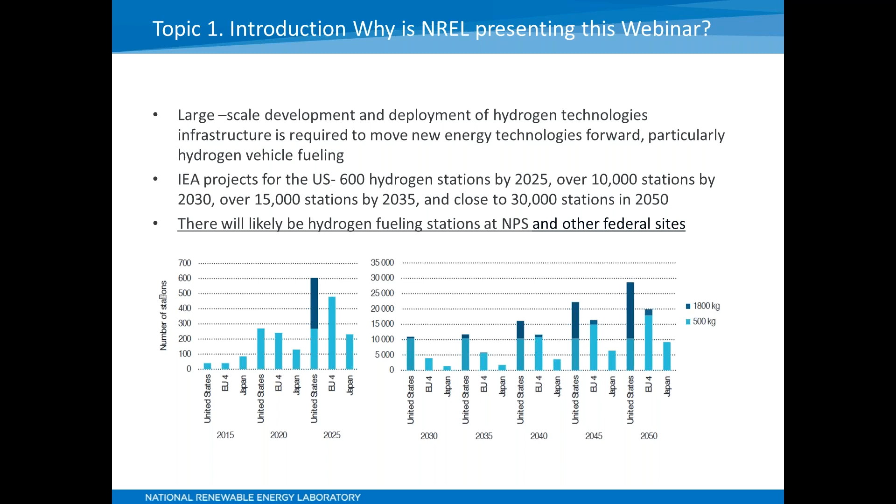So these projects, although there aren't that many of them, are in some ways prototypes, and they are starting to happen. Given that the deployment of hydrogen looks like it's moving forward, specifically the deployment of hydrogen fuel cell vehicles, it's likely that you'll see some kind of project at your site. So the purpose of this webinar is to give you an orientation, so that if that happens, you have an idea of what this technology is about, and how it's regulated, how the codes and standards apply to these fueling stations.

So a little background on hydrogen. Why is there this interest in hydrogen? It may seem a little bit unusual because right now there is not a retail infrastructure for distributing hydrogen, and there is not the kind of hydrogen production that will be needed for widespread deployment. So there will be a lot of infrastructure that is needed. So why is there this push to do this?

There are several reasons. One is hydrogen is an excellent fuel for fuel cells, and fuel cells produce almost no hydrocarbon emissions. So it's a zero emissions technology, zero carbon emissions technology.

Another really critical point is that hydrogen can be produced from a variety of renewable energy sources, such as wind power, solar, and biomass, and some of these technologies are very well developed and fairly mature. So what you can do to address this gap in hydrogen production is use some of these renewable technologies, such as wind and solar, to produce large amounts of hydrogen.

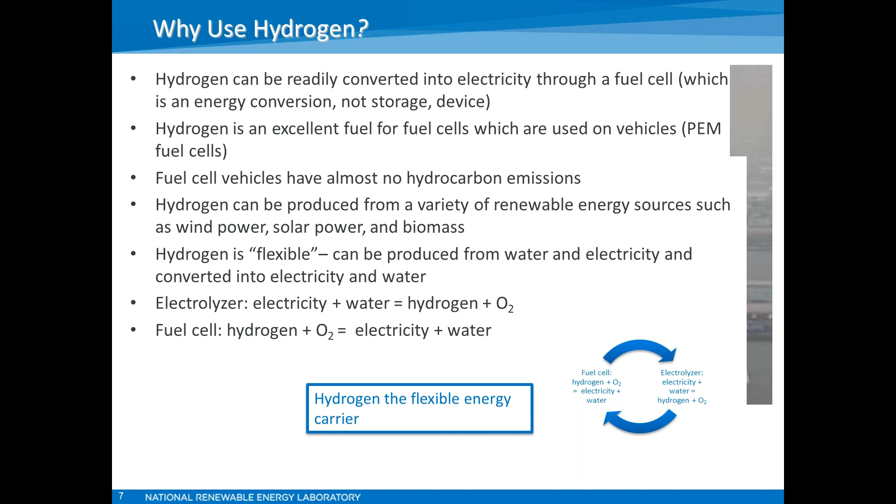A little bit about air pollution and how important it is, even though it maybe doesn't rise to the top of the list as far as topics in the news. In 2002, there were 6,500 premature deaths from air pollution in California. To put that in perspective, there were 3,500 fire deaths nationally. So in the whole United States, there are far fewer fire deaths than there were deaths from air pollution in one state, California. And the United States, even in areas with major vehicle density, still has relatively clean air.

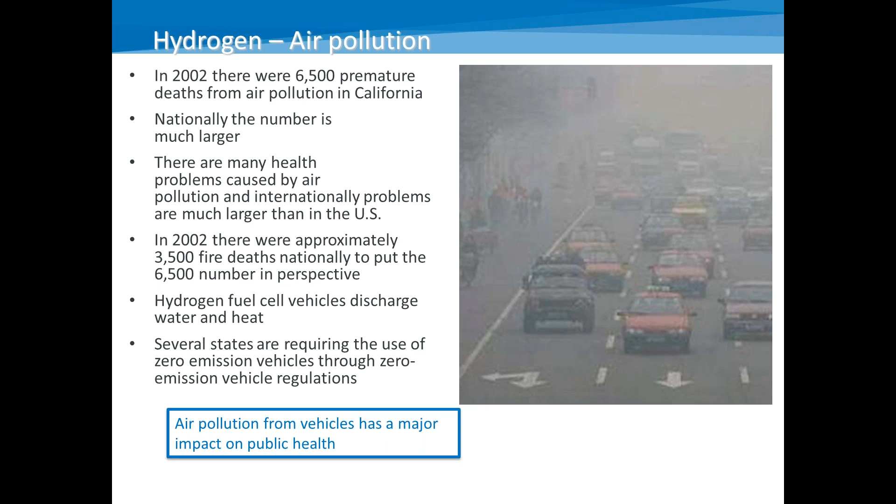This air pollution problem causing premature death is much worse in other locations. Probably many of you have seen pictures of Beijing and have a sense of what the air quality is there. So to address this problem in the United States, there are actually regulations that have been put in place.

As a result of these regulations, the deployment of hydrogen fuel cell vehicles happened in California initially, but it's also underway in this northeast corridor. There are stations being built in Massachusetts, Connecticut, New York, and I believe Rhode Island, to create a network of stations on the East Coast so that vehicles can transit the coast and still have fuel available.

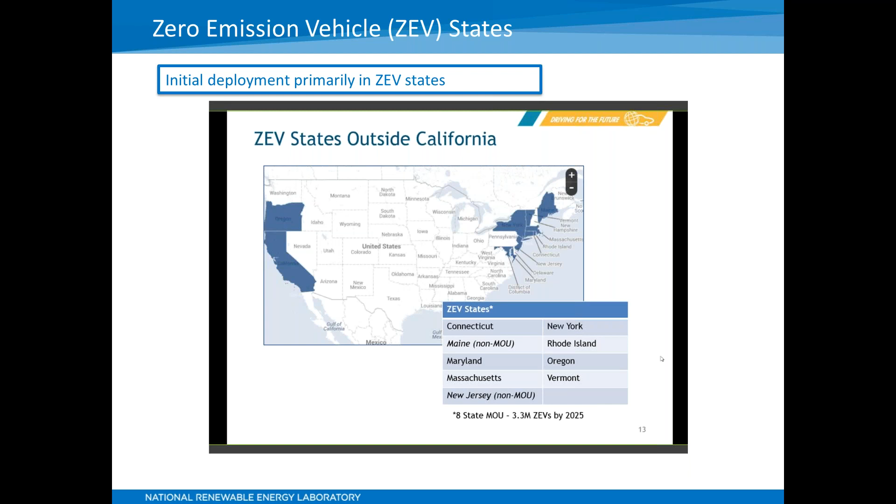In California, there's a network of stations. I believe there's 30 retail stations open now that allow you to use a hydrogen vehicle throughout the state of California.

So a little bit about the properties of hydrogen. Just to make it clear, hydrogen is not new as far as its being used with hydrogen fuel cell vehicles. It's been around quite some time.

As a commercial commodity, there was a process developed in 1913 by the German chemist Fritz Haber to make ammonia from hydrogen, and this had a huge global impact because it allowed for the mass production of fertilizers required to feed people, resulting in literally millions of people getting food who wouldn't have without this fertilizer to expand crop growth.

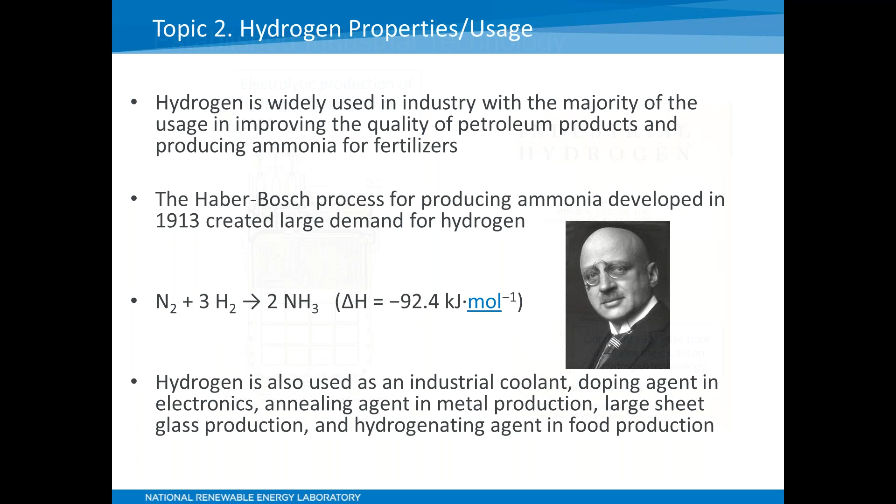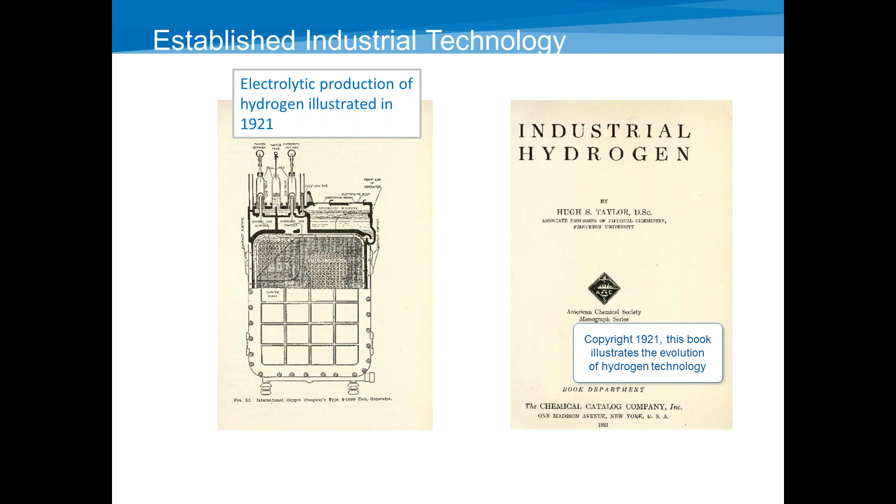I think we skipped a slide here. Just want to mention this is an example of the historical use of hydrogen. This is a handbook on industrial hydrogen that was published almost 100 years ago, and actually a lot of the information there is perfectly valid today.

Now I want to get into a little bit of the physical properties of hydrogen, because hydrogen really has some unique characteristics. It's important if you're dealing with a hydrogen project, particularly if you've got safety responsibility, to understand some things about hydrogen that make it different from other materials and other gases you might have to regulate.

First of all, hydrogen is the lightest element. What you see in that second column is that it has a specific gravity of 0.07 — that's the density relative to air. So what that means is that if you release hydrogen into the air, it goes upwards, and it goes upwards very quickly. Hydrogen, unlike some other gases and fuels, can't be odorized.

As a result, sensors are required to detect hydrogen releases at locations like fueling stations. Other fuels like natural gas, you can add mercaptans to them, and that way you can smell any release.

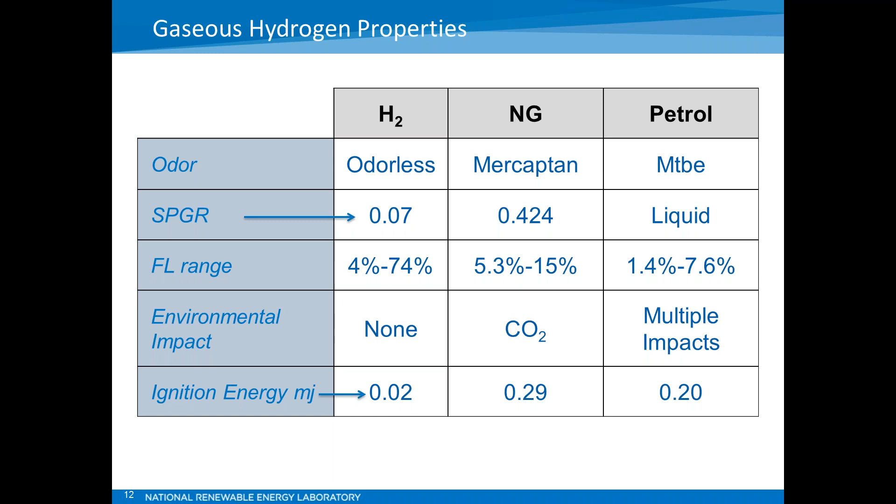Hydrogen has a fairly wide flammable range. That doesn't have as much safety impact as the fact that it has a very low ignition energy — you see that 0.02 millijoules. So what that means is if you do have a hydrogen release, and it's not immediately ignited, it will probably just disperse upwards rapidly. However, it does not take much energy to ignite it. So that gives you a little bit of a picture of what you're dealing with.

Some more aspects of hydrogen: because it has very low density, it has to be stored at high pressures. So to have enough hydrogen to give a vehicle a required travel range, you really have to up the pressure on the vehicle storage to get enough hydrogen on the vehicle.

That means pressures of 10,000 psi are used on vehicles. Those are the passenger vehicles currently being sold. And the fueling stations have to be able to go above 10,000 psi to drive that hydrogen into the vehicles.

Hydrogen, because it's a very small molecule, can attack materials in ways other gases can't. So the kinds of materials used for hydrogen storage are very specific, and there are certain materials that can't be used. And as I mentioned, hydrogen can't be odorized, so you need to have sensors in the environment where hydrogen is used to detect any potential releases.

Hydrogen has essentially no environmental impacts. It's not toxic. So if there is a situation where hydrogen is released and there's no immediate ignition and nothing to contain it, it will typically go upward very quickly, dissipate, get out of the flammable range very quickly, and there's no action required.

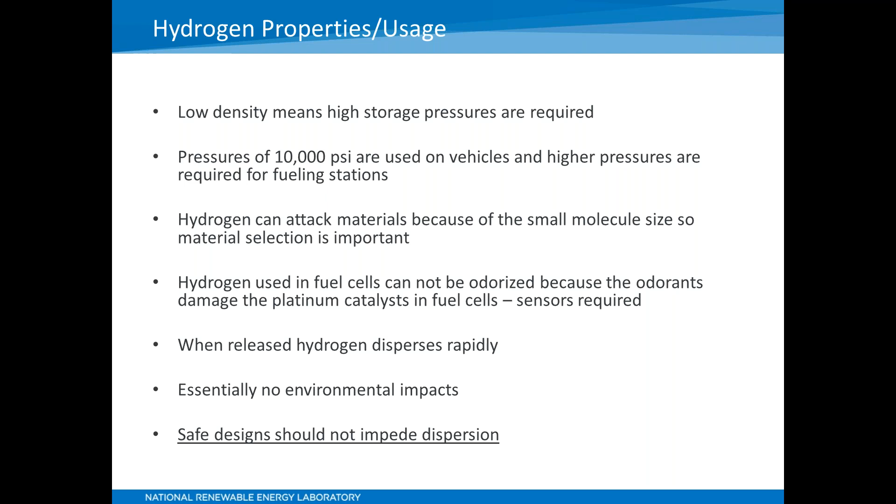So from that follows this last statement: safe designs involving hydrogen fueling stations and other hydrogen technologies should not impede the dispersion of hydrogen, because that's really one of the main safety attributes of hydrogen—if you have a release, it's going to be gone quickly, and it will not be in the flammable range very long.

So how does this compare to some other fuels? Pure hydrogen burns with a nearly invisible flame and low radiant heat. So if you're confronted with a hydrogen fire in broad daylight, you may not be able to see the flame—you may have to use some kind of detection device if you think there's actually a fire. And because it has such low radiant heat, you will not feel the heat of the flame until you're almost on top of it, which makes it a lot different than hydrocarbon fires.

As a comparison, for example, a propane release will actually, because propane is denser than air, migrate downward and can be retained in below-grade spaces. You can have propane in a below-grade space in the flammable range retained for years, and then you somehow open up that space, ignite the propane, and you have a fire. That kind of situation won't occur with hydrogen.

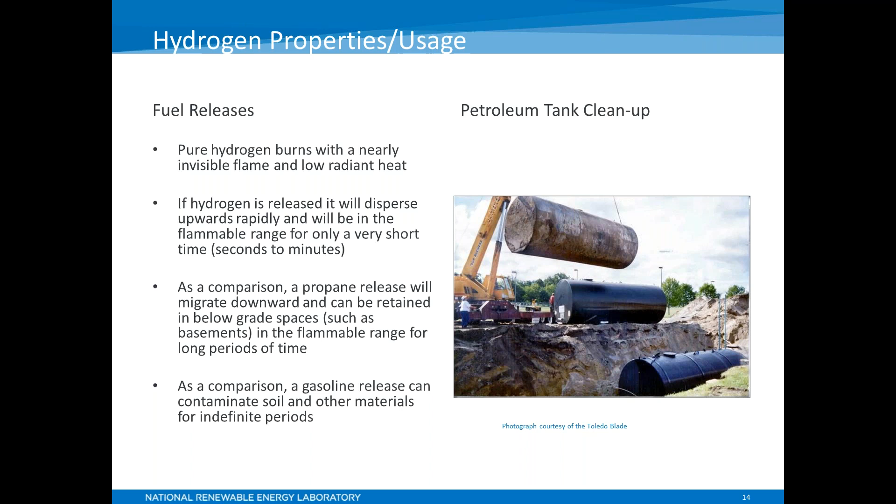And another thing that won't occur with hydrogen is, if you have a release, there's nothing retained. For example, with gasoline, if you have a spill out of a tank—fairly common with older below-grade tanks that have degraded—you get release from gasoline, soil contamination, and you see a picture here of a tank replacement operation in place. But that's something that will never happen with hydrogen. If it's released, it's not going to contaminate anything.

Now, I mentioned that because hydrogen has such a low density, to get the required amount of hydrogen for applications, you're going to need to get that hydrogen up to a very high pressure. And what also follows from that is that to get the kind of storage amounts you need, having a lot of high pressure tanks may not work, and therefore you're going to have to consider the possibility of liquid hydrogen storage.

And liquid hydrogen is really an interesting material to deal with because it boils at minus 423 degrees. It is extremely cold, so it takes a lot of energy to liquefy it. It has to be stored, of course, in a cryogenic vessel, which is really two vessels, with a vacuum drawn in the interstitial space between them.

But even dealing with liquid, the liquid density of hydrogen is much lower than other liquids. So here's an interesting fact about hydrogen: there's more hydrogen in a gallon of liquid water than in a gallon of liquid hydrogen, because the density of a gallon of liquid water is much higher than a gallon of liquid hydrogen.

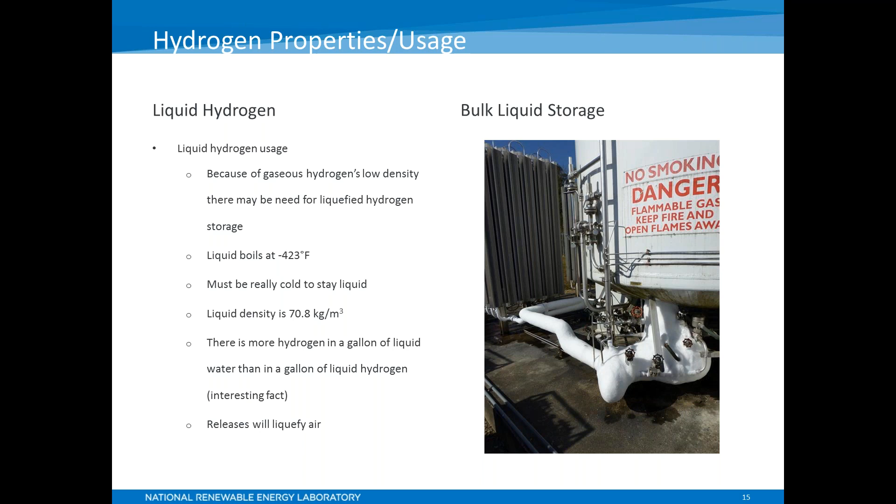It would also disperse rapidly upwards. So that's something to keep in mind if you're dealing with a liquid hydrogen storage system: it's unlikely that liquid hydrogen would ever touch the ground, and these systems are constructed without berms to contain any liquid spills, unlike petroleum storage systems.

Now let me move on to NFPA 2, the National Hydrogen Code. As I said, it's been designed specifically to be this kind of central repository of hydrogen requirements. So it's the code you can start with, and it will pretty much point you to all the different requirements you need for whatever project you're dealing with.

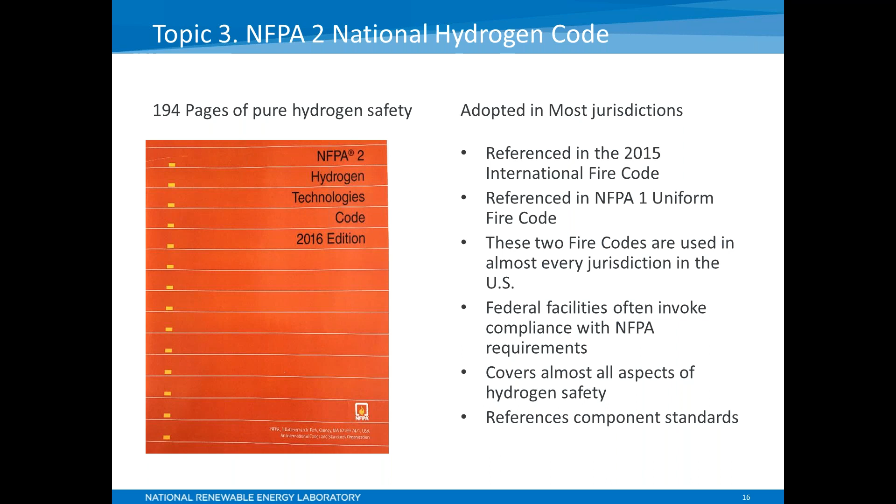I want to make it also clear that NFPA 2 is referenced in the two major fire codes used in the United States, the NFPA 1 Uniform Fire Code and the International Fire Code. As a result, it is effectively the law in all jurisdictions in the United States where one or both of these codes is invoked. So that means legally it is also really the national code, and as I mentioned, it covers almost all aspects of hydrogen safety, and it references many other documents, including component standards.

Here's a little picture of what the structure of NFPA 2 looks like. These are just from the table of contents, the different topics it covers. It's structured, like many NFPA documents, with a set of general requirements up front, and then more specific requirements like requirements for bulk gaseous hydrogen storage and bulk liquefied hydrogen storage.

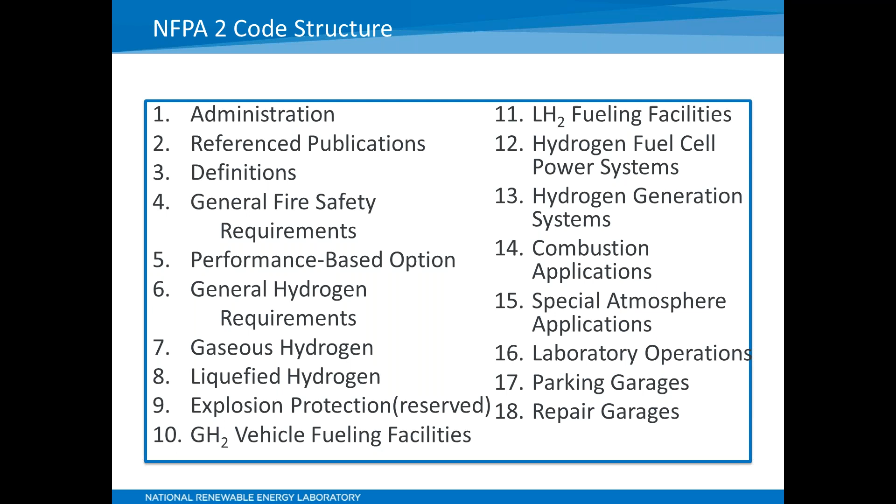One of the chapters I'm going to spend a little time on is Chapter 10, which is really the chapter for hydrogen fueling stations. But I should also mention it covers other facilities, for example repair garages, because there are already repair garages being modified to accommodate hydrogen fuel cell vehicles.

Going through the code, I thought it'd be helpful to look at some of the code requirements that address a hydrogen fueling station, because that's probably the project you're most likely to see first. I thought I'd give you a picture of what a hydrogen fueling station is, because it is a little bit different than a gasoline station, although it has a lot of the same basic pieces.

What you see here are really three parts - you can break up the station in different ways, but this is a simple way to give you a picture of what the station consists of. First of all, you have storage. You have to store the hydrogen on site, and that's true even if you have the ability to produce the hydrogen on site - you still have to store it.

There are some stations that do produce hydrogen on site, other stations have hydrogen trucked in, and some stations actually connect to hydrogen pipelines, but they all have some type of hydrogen storage. That storage could be liquid and gaseous storage, but it is going to at least include gaseous storage. The reason is that even for stations with liquid storage, that liquid hydrogen is vaporized and then compressed and dispensed into the vehicle as a gas. So right now, all the hydrogen fuel cell vehicles out there are getting gaseous hydrogen at the dispenser.

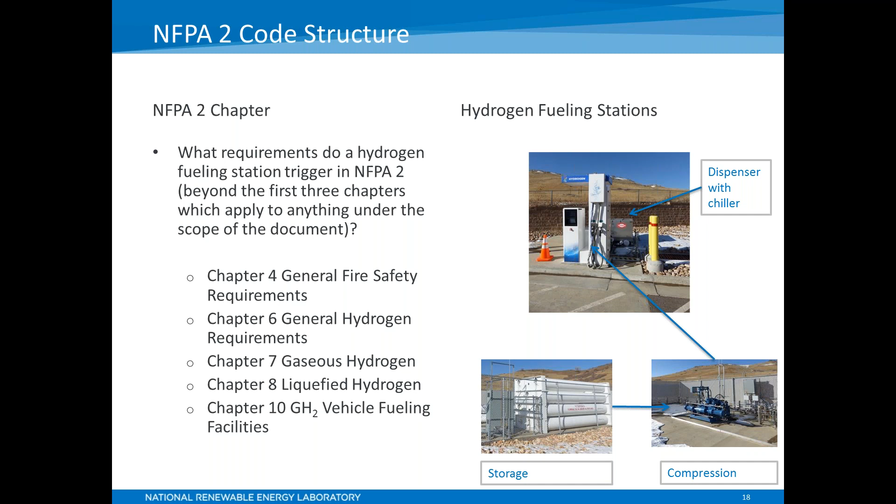And the goal right now is to replicate the experience of filling a conventional vehicle. So filling a hydrogen vehicle takes about 4 or 5 minutes, which is roughly the same as what it takes to fill a conventional vehicle. So anyhow, there are these 5 chapters that I've identified here that deal specifically and generally with hydrogen fueling, and I'm going to talk a little bit about them.

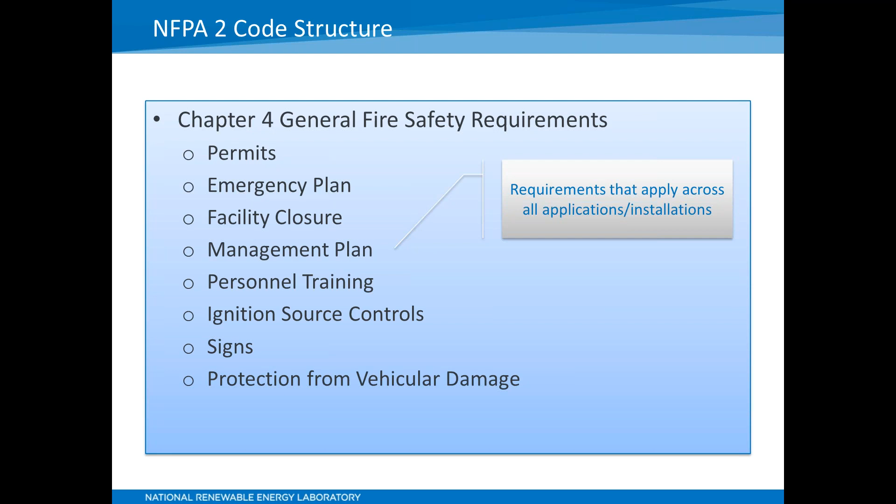First, chapter 4 has just a set of general requirements that kind of cut across all applications and installations, and these are things like if you have to get a permit, it tells you what you have to do. Emergency plan, what has to be in that emergency plan, what are the criteria for facility closure, management plan, what kind of personnel training is required, signs, protection from vehicular damage.

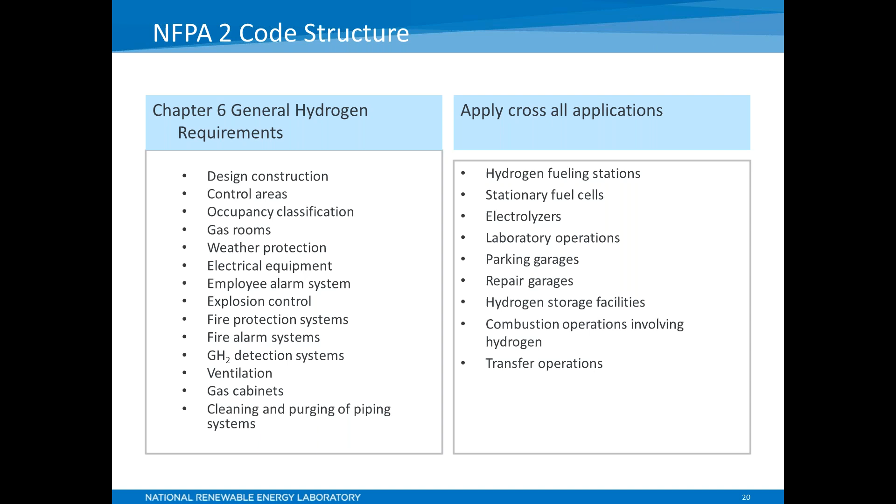Next, you get to chapter 6, which is the general hydrogen requirements. So this gets into more hydrogen-specific general requirements; these may not all apply to a fueling station, but some of them do. And there's things like requirements for fire alarms and gas detection. Some of these requirements, for example, for gas cabinets, you're not going to have a gas cabinet typically at a fueling station.

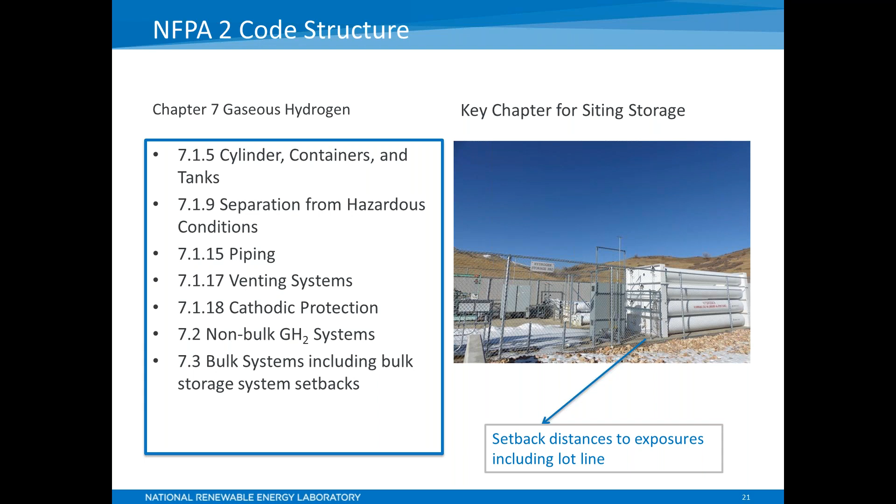Next, chapter 7 is the chapter where you get into the requirements for the bulk gaseous storage, and this is going to be really one of the critical set of requirements at a fueling station because all these stations are going to have bulk gaseous storage of some sort. I'm not going to get into all the details of what's here, but I should mention that in this chapter there's a requirement for setback distances to various exposures, and this has been kind of a tricky issue for complying where you have stations going to urban areas where there's not a lot of space and they can't necessarily meet all the setback distances for their hydrogen storage.

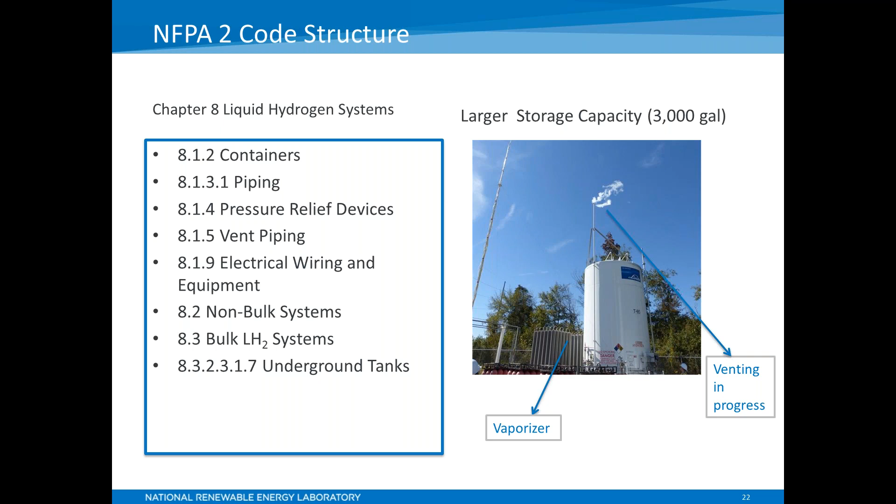Next is the requirement that deals specifically with liquid systems. There's a whole new set of hydrogen fueling stations that are going in California, I think probably in the next couple of years, and they're all going to have liquid storage. So liquid storage is happening. Most of the initial stations that went in did not have liquid storage, but what's happened is there are more vehicles out there, and without having liquid storage, the stations don't have the capacity to fuel the vehicles that are out there. So it's a good thing to see this deployment advancing.

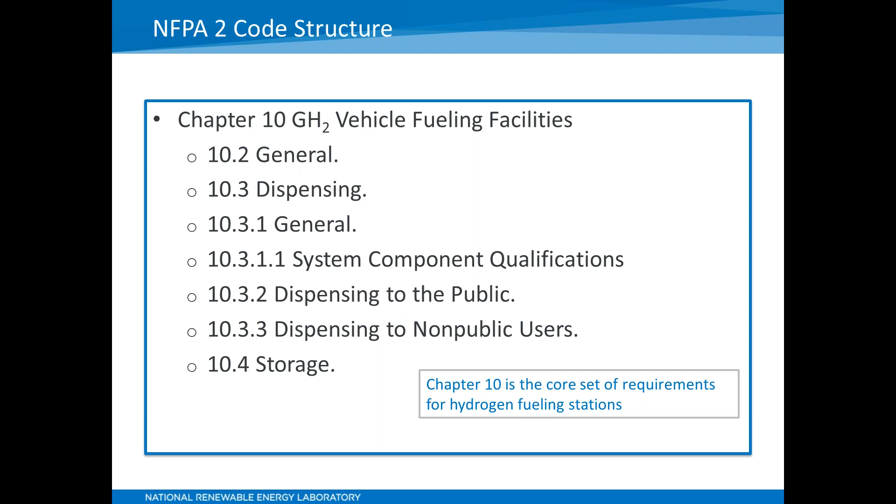Next, the chapter that is really the fueling station chapter, and that's chapter 10. That's where the core set of requirements are for hydrogen fueling stations, and it kind of lays out all the things about how the different pieces of the station have to work and how the dispenser has to work. I can't get into all that detail, but I would just want to mention a couple aspects of chapter 10.

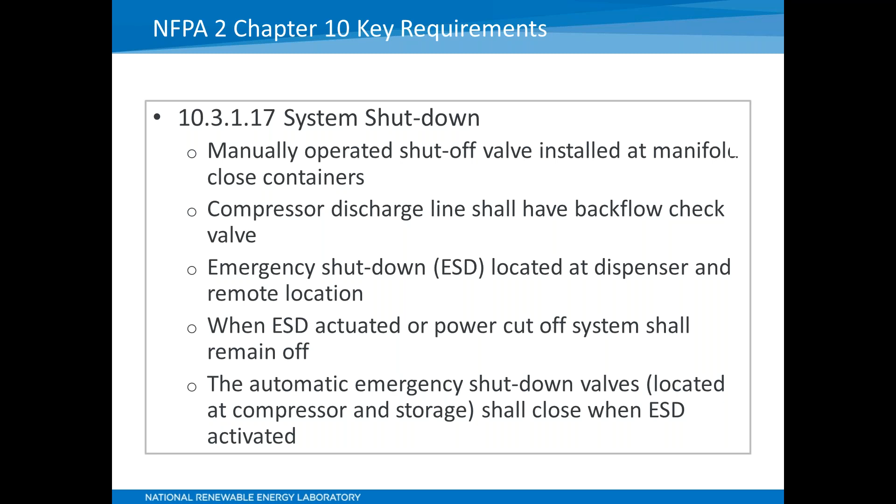One is that there's a lot of requirements to deal with system shutdown and when you can start up a system after it's been shut down, and that's particularly important because what that means is if you do have a problem at a fueling station, it's going to shut down. It's very unlikely that you'd have any kind of large hydrogen release. Most likely you will just have a station shut down and be in a situation where you have to bring that station back online.

And next, there's several requirements that deal with maintenance of different components and systems at the station. This is important. I mention it because maintaining a hydrogen fueling station is really critical. Hydrogen, because of the high pressures and small molecule size, likes to escape from wherever it's being held captive. And as a result of that, you have to have a robust maintenance and leak management program to make sure you know what's happening at the station and you identify any problems and correct them before you have any kind of release.

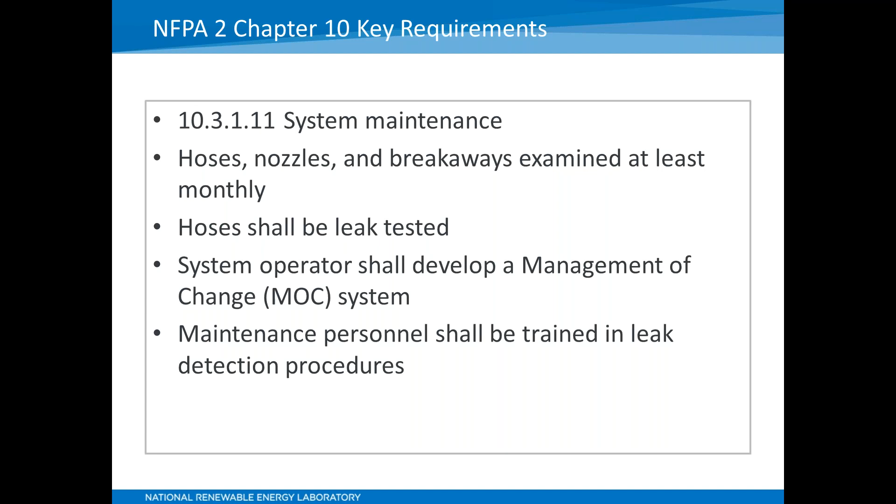So now I'm going to talk about actually applying these requirements to a hydrogen fueling station. So I'll show you some pictures of the different pieces of a hydrogen fueling station. Most of these photographs are actually taken at the NREL station, but these would look the same at a commercial refueling station. The only difference is there's a lot more space around the station than you would typically see at a station on a busy street.

So you look at the station and you can break it down into the system components as storage, compression, cooling, and dispensing. And then there are cross-cutting aspects of this fueling station. There's sensors and alarms that kind of move across all these different components, emergency shutoffs, and process controllers to make sure that the station is operating within its required parameters.

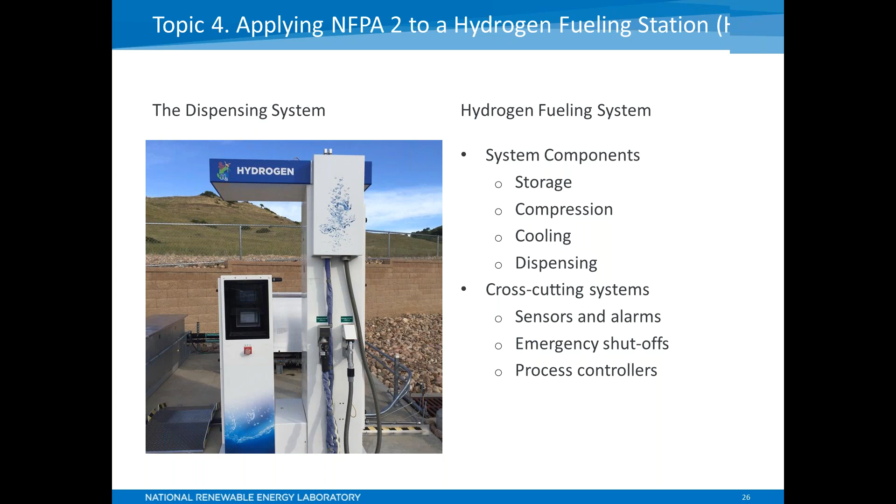And I'm going to go through a little check sheet that I put together with the help of the National Park Service. This is for the Brentwood project, and it's not meant to be a comprehensive picture of what's in NFPA 2, but it pulls out some of the more important pieces of the code. And I put it in here. It may be helpful. I think Raul Castillo found it was useful for the Brentwood project. And then I'm going to talk about several of these items in the check sheet and show you some photographs.

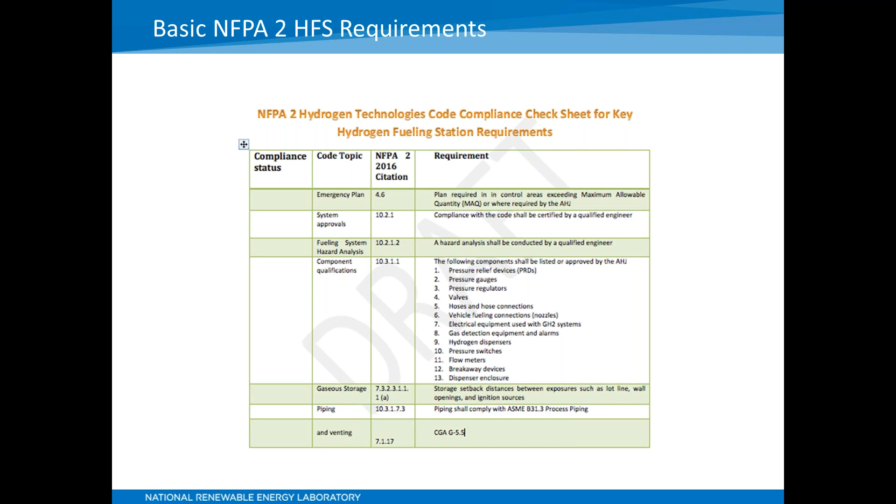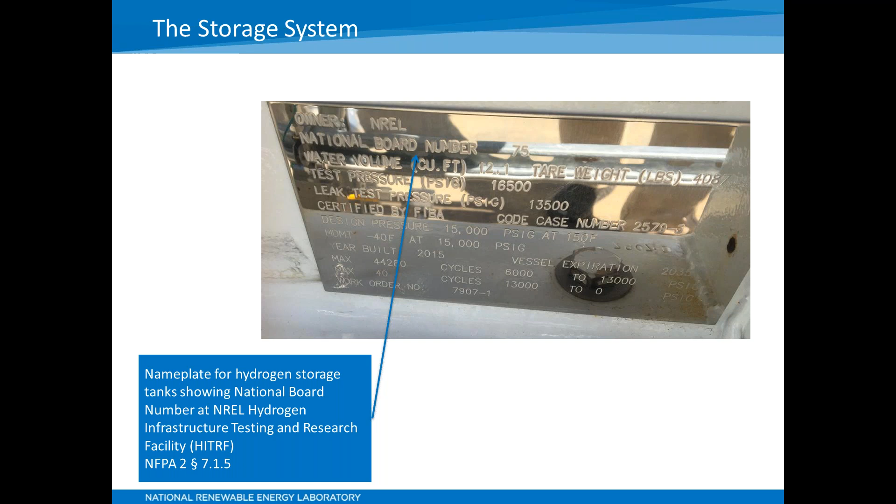So we'll move along, but first we always start with the storage system. And what you see here is the nameplate on the hydrogen storage tanks that are actually at the NREL site here. And a key point is that these are ASME tanks, so they're designed to the ASME code, and then they have to be approved by the National Board for pressure vessels. So these tanks, to kind of put the different components in some kind of safety perspective, are extremely robust. The chance of having something go wrong with the tank, any kind of leak through the tank itself, is very unlikely.

Next, when you look at these tanks, you have to look at this issue of setback distances from different exposures. And I pulled out some of the key exposures that are in the NFPA code. So those exposures are things like lot lines and air intakes, openings in nearby buildings. The basic idea is that if you do have a release from the system, that it's not going to get into the air intake of a nearby building, or it's not going to get past the lot line and have any safety impact.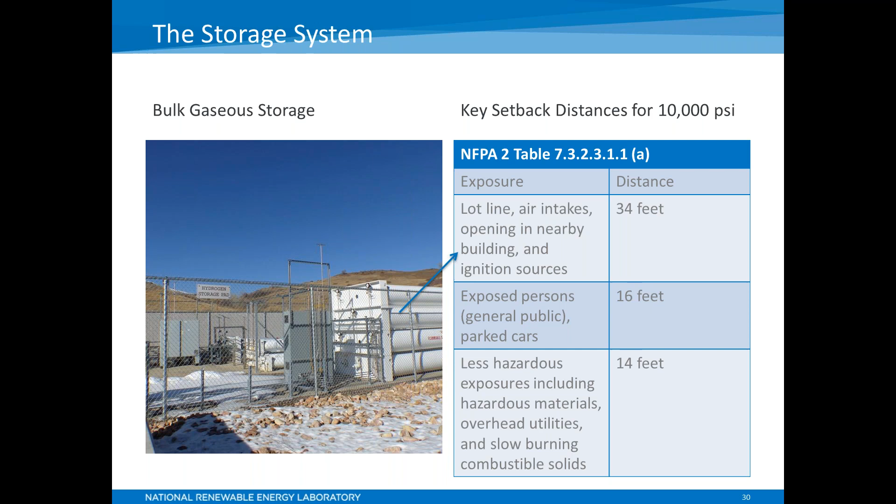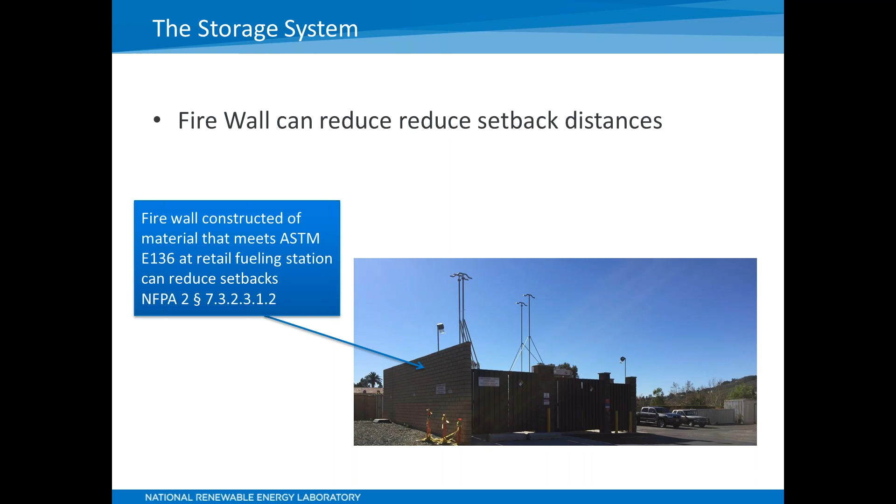There's a feature of the code that I also want to mention. That is that if you're having difficulty meeting these lot line or other separation distances, there's a provision in the code that you can put a firewall between your system and whatever that exposure is and reduce the setback distances. And I mention this because this provision in the code I think has been used in a lot of these California stations.

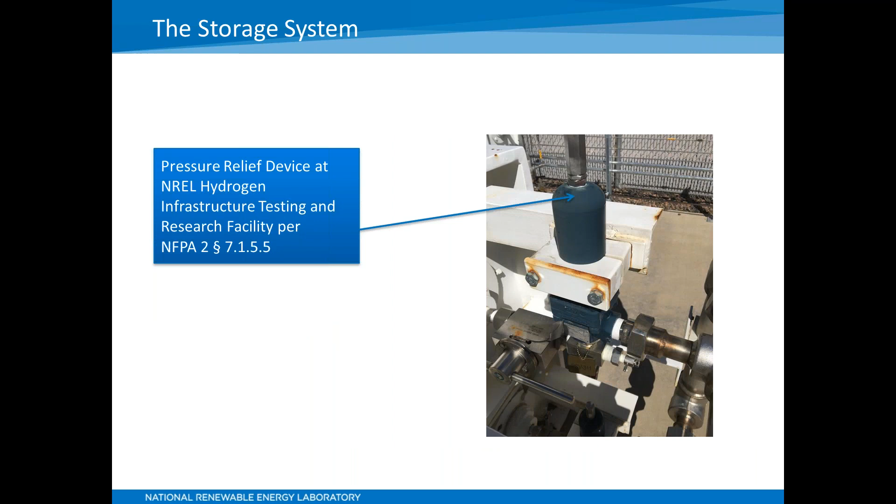So you have to have pressure relief with any high pressure system, and there are requirements for the pressure relief devices. And it follows that if you have pressure relief devices, you have to have an ability to get that hydrogen, if there's an overpressure, out into a safe location. So there are provisions for vent stack designs, and the basic requirement is that you vent to a safe location that won't have any impact on the system or public safety.

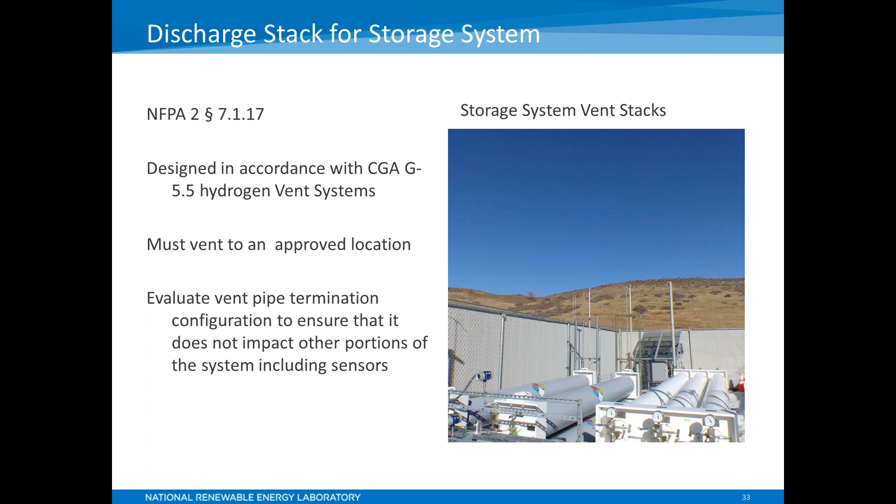Next, a key piece of the system is a compressor, because the compressor is what gets this hydrogen, which may be stored at a lower pressure, like 3,000 psi, up to the pressure that's required for dispensing. And it's also because it has more moving parts really than just anything else in the system, and it's dealing with very high pressures, and it's dealing with hydrogen.

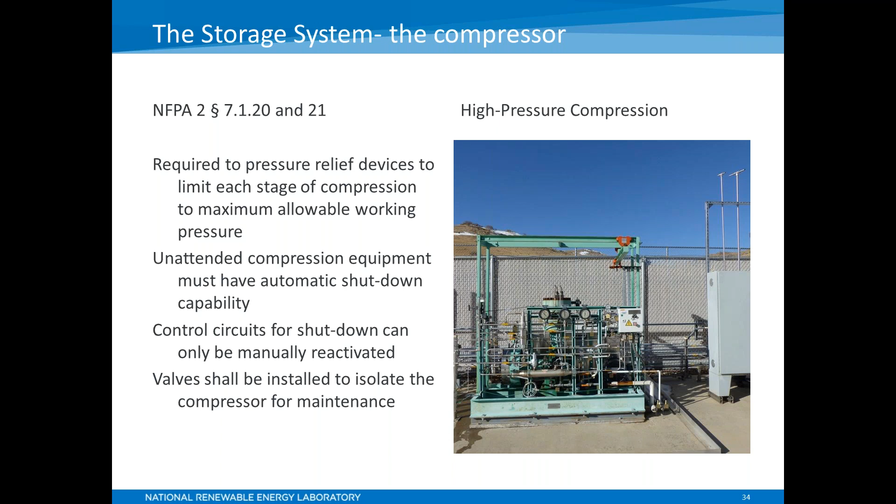We've seen that these compressors are one of the more vulnerable pieces of the system. They're more prone to breakdown. That doesn't mean that there's a safety problem. It does mean that the system gets shut down and you have to do repairs on your compressors. And we, meaning NREL, have a program for collecting data on these stations, and we've seen that compressors are an issue, and we're also looking at ways in which we can improve compressor performance.

Next, you've got your hydrogen cranked up to the pressure you need, and you're ready to put it in a vehicle. This is the NREL station. Once again, we have the capability of dispensing both high and low pressure hydrogen. What that means is the highest pressure hydrogen is 10,000 psi, and that's what's used in the passenger vehicles that are currently available now. The lower pressure hydrogen is 5,000 psi, and that's what's used in forklifts, and it's also used in buses.

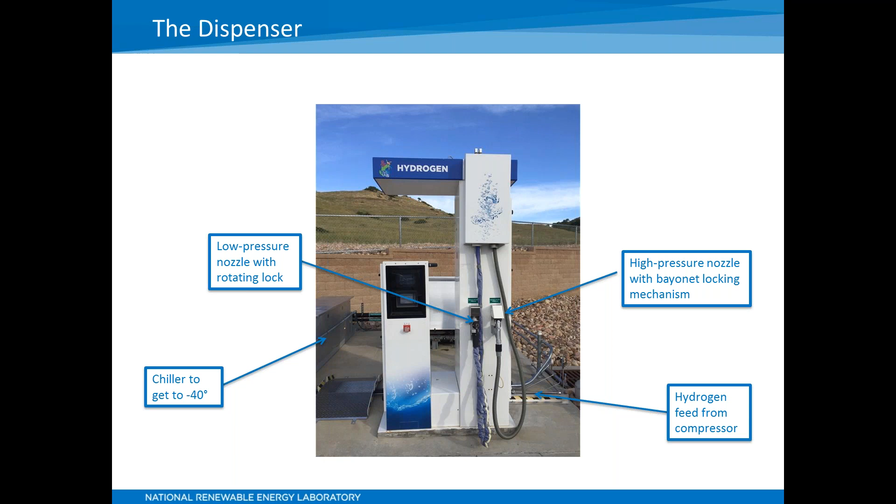There are some fleets of buses operating out there now that run on hydrogen, and they typically run on lower pressure hydrogen. They don't have the same issues with fill time, so they can take their time in filling the vehicle. Also, as I mentioned, there's a chiller that's part of the system to get the hydrogen down. It may have to go down as low as -40 degrees, but chilling the hydrogen allows you to decrease the fill time and get this fill time comparable to a gasoline vehicle.

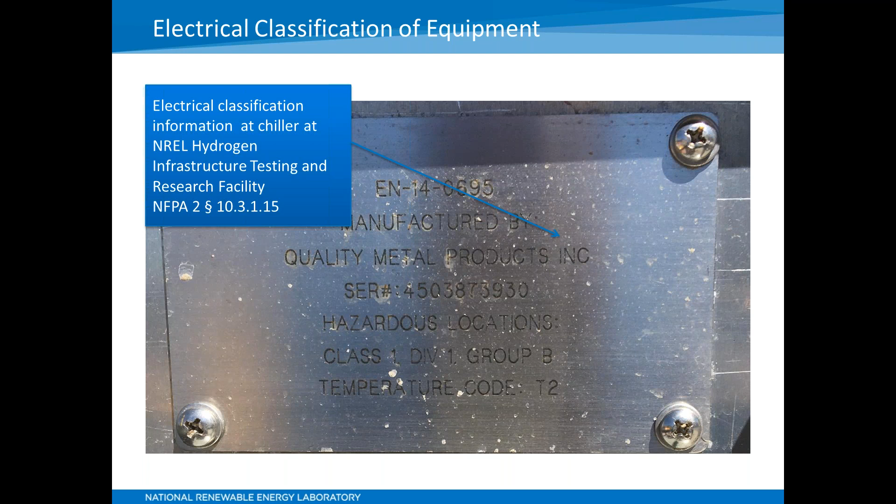So this is a panel on the chiller at NREL, and it shows the electrical classification, because there are requirements that components within a certain distance from the dispenser meet electrical classification requirements. This is a Class 1, Division 1 chiller.

Also on the dispenser, and this is similar to what's at gasoline stations, there's a breakaway device so that you can't have the nozzle in your vehicle and drive away. One thing I should mention is that when you have a hydrogen fueling nozzle connected to a vehicle, it's locked to that vehicle, because we're dealing with high pressures. It's not like a gasoline vehicle where you have the nozzle essentially just resting in the receptacle.

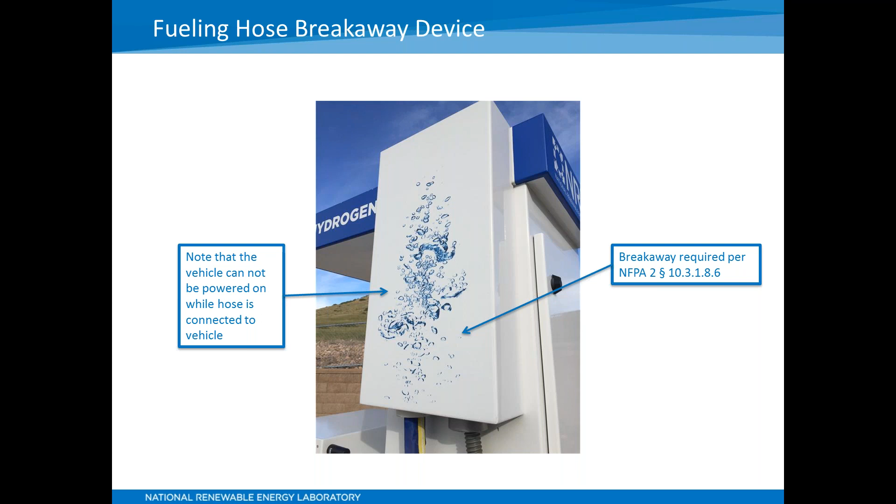The nozzle is locked onto the vehicle, because at that point the vehicle and the dispensing system are essentially one high pressure hydrogen system. So what that means is that when the vehicle is connected to the dispenser, the vehicle cannot be turned on. So it's very unlikely that you would have this breakaway device actually activated, because you'd have to somehow override some system to be able to even turn on the vehicle while it's connected to the fueling system.

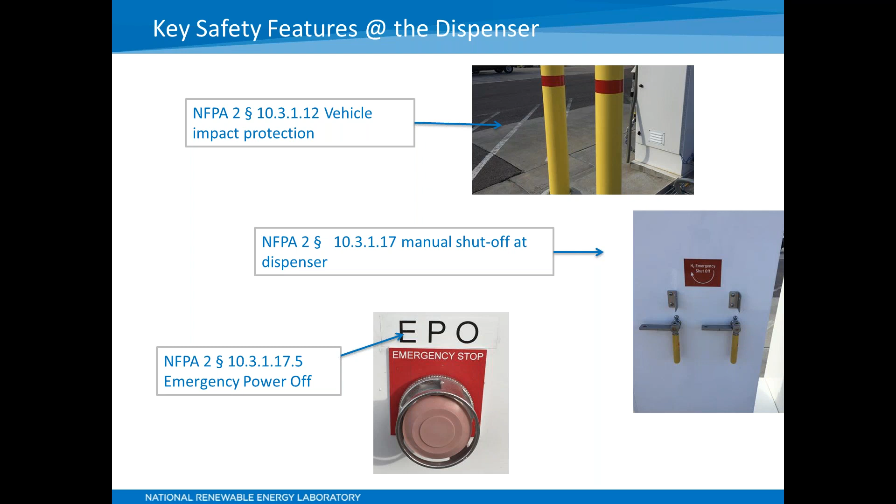So these are some of the additional safety features at the dispenser. You see there are bollards to protect the dispenser from being hit by vehicles. There's a manual shutoff on the rear side of the dispenser, so you can completely shut off the system. There's emergency power off that shuts off the dispenser, one located at the dispenser, and then one at a safe distance from the dispenser. So there are a lot of safety features. Some of them can be manually activated. Others are passive safety devices.

Next, I want to spend a few minutes talking about the really extensive set of permitting resources and tools that have been developed to help people who may have to do or review one of these projects. These tools are all available at the web link that you see at the bottom of the page, H2 Tools. And the first tool I'm going to talk about, I really encourage people who have to review one of these projects or are in the position of being a project developer, to take a look at this permitting video.

NREL worked with the Orange County Fire Authority in California, which has done more permit reviews for hydrogen fueling stations than any jurisdiction, to develop this video, and it really gives people a quick orientation on what a fueling station is, what some of these safety issues are and what the code requirements are. There's also online code official training. There's a whole series of NREL technical reports that drop into several levels of detail beyond the video. And then there's a national permit guide for hydrogen fueling stations. And then there's a permitting website that has really detailed code citations for both hydrogen fueling stations and other technologies such as stationary fuel cells.

So there's a lot of information out there, and it's deliberately designed to go from the orientation piece of information or tool down to a fairly detailed tool. So it's meant to address the needs of all users, starting from someone who's just getting introduced to this technology to someone who's actually done several permit reviews or developed several projects. So the message is there's a tool for every user, and it's all available.

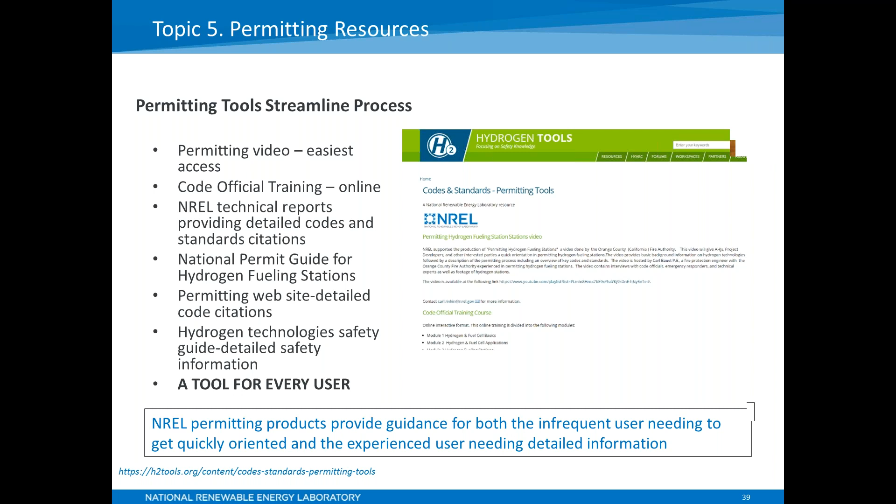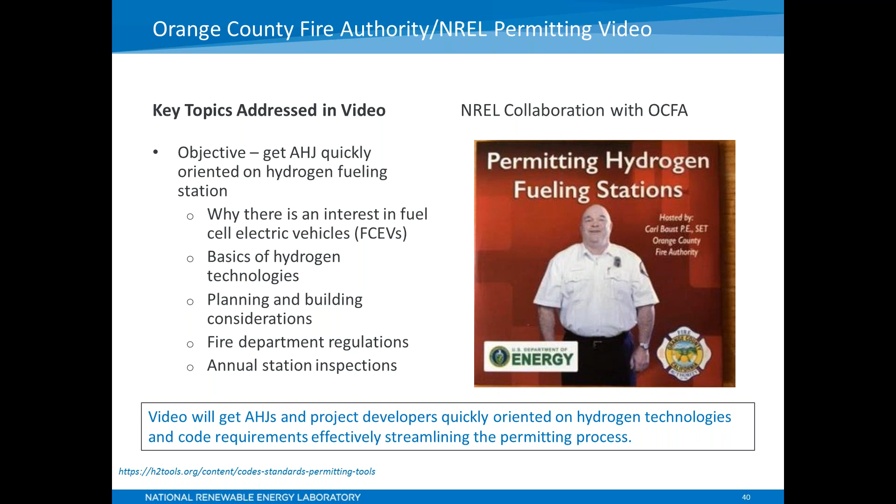The video I mentioned was done in conjunction with Orange County. Got to give special thanks to Carl Baust. He was the fire protection engineer who is the primary driver in this project and is the host for the video, and I encourage you to take a look at this if you're in a position of having to do a project.

There's also an updated version of this code official training course. It's an online training course that walks you through both the basic safety issues of the technologies and the code requirements. It also has a wealth of links to all kinds of information and resources, so it's really handy and can be used at different depths. You can just cruise through this, or you can check out all the links and get all kinds of information on hydrogen properties and projects.

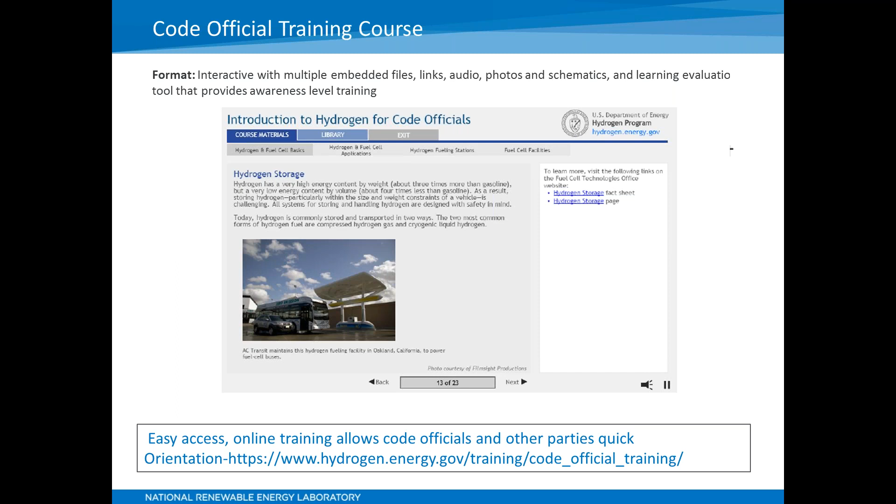So in conclusion, I just want to make a few points, and then we'll open the line up for questions. DOE has supported the development of a comprehensive set of codes and standards to permit hydrogen technologies, including fueling stations. This has taken place over a period of almost 15 years.

So these requirements are out there. They are now actually being, in a lot of ways, field tested by the stations that are being put in now, but they exist. So you're not confronting a situation where there are no codes to address these technologies.

The centerpiece of these codes and standards is this National Hydrogen Code, NFPA 2. So you don't have to wade through all the other documents that are connected in some way to get started. You start with NFPA 2, and that will point you to all the other documents that may be part of the project review.

And once again, why is this a concern? There are thousands of fueling stations that must be built to support the commercial deployment of fuel cell vehicles, and that deployment is happening, driven by major forces that aren't going to go away, such as air pollution and the need for using clean, renewable energy technologies.

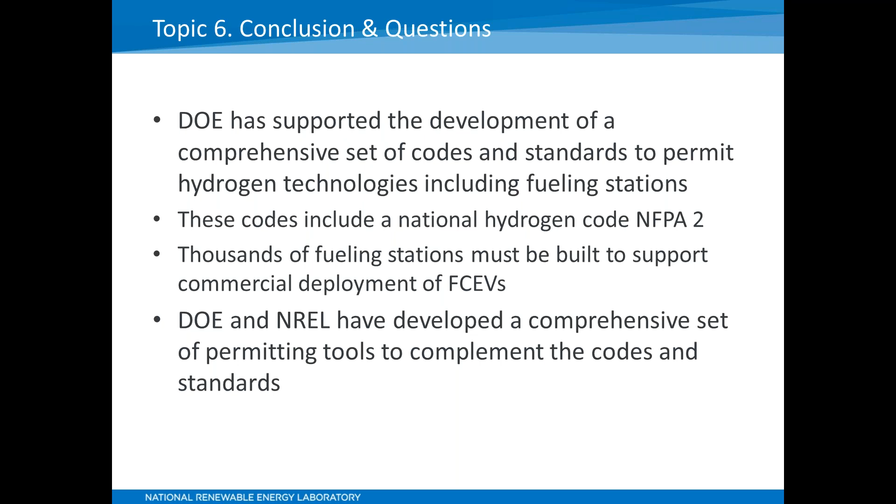And with that, once again, I want to thank the Federal Energy Management Program for supporting this webinar. I will stop here and see if we have any questions. Thank you.